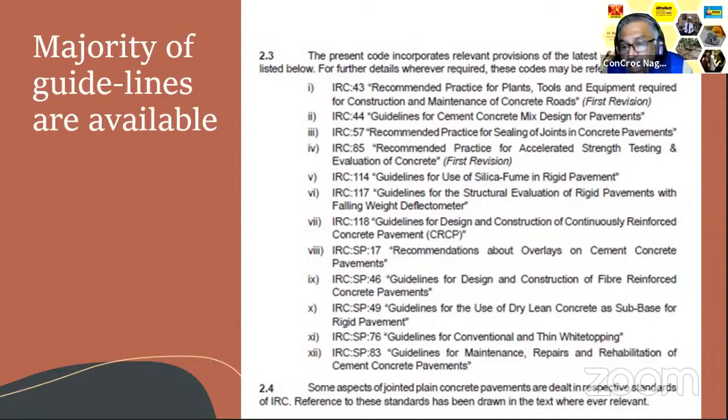And even in highway segments, state highways, or district major roads, making regular soil-based or macadam-based sub-base is very expensive, and water is scarce. Because of this, use of dry lean concrete and stabilization of soil has come in, so you will need to know all these things too.

In conventional design, when you design a building, you always design from the topmost floor to the bottommost floor. However, the construction starts from the foundation to the topmost floor.

Similarly, even in the basic construction of a concrete road or any pavement, whether bitumen or concrete, the levels for the road start from the top of the drain, because water drained off from the surface of the road should get into the storm water drain.

Otherwise it will be suicidal for the road. And believe it or not, unfortunately, ignorantly, or by oversight, most of our municipal corporation roads continuously suffer because of that. The top of the drain, which is normally constructed a few months after the road is made, assuming the road will increase its depth when relaying of bitumen happens, is kept above the surface of the road. Now where does the water go?

Number one, very important, is shoulders. Especially in case of concrete road, it's very vital, because concrete is a very rigid material. At the end of the edge of the concrete pavement, you have a sharp edge. Suppose your shoulder is not strong enough, due to rain the shoulder gets worn out. A vehicle, especially a two-wheeler, going to the edge of the road has got all possibility to skid off, roll down, or topple. So anything can happen.

So what is a shoulder? It serves as a lateral support. This is the fundamental objective. The shoulders on either side of the road, whether bitumen or cement concrete, should give lateral support to the entire structure of the pavement.

It should also serve as a safety track in case of narrow roads, when a vehicle is overtaking another vehicle, or when a vehicle gives way to another vehicle, they have a tendency to slip off from the main pavement way and come into the shoulder. Please note, if the shoulder is not strong enough, gradually the shoulder will wear away and the edge of the pavement gets exposed. So this is very, very important.

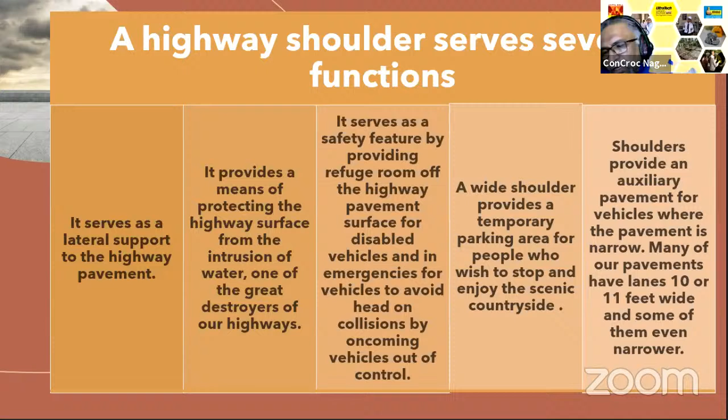And this portion of the pavement is very vital. How strong, how durable, how weatherproof you have done it. So they have to integrate themselves.

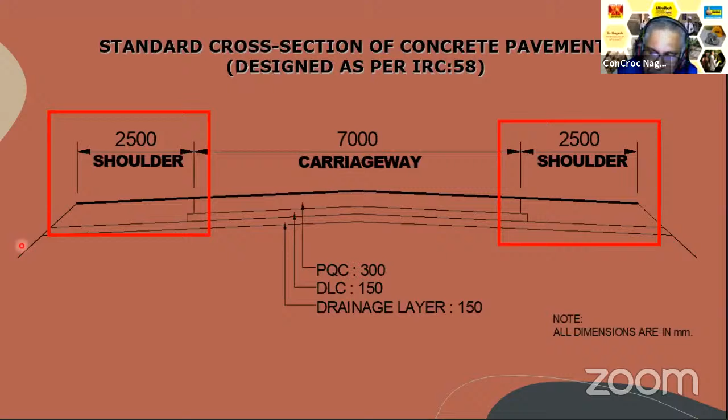Normally, this is how it is. A 7,000 mm or 7-meter carriageway is expected to have a 2.5-meter shoulder on either side, but for various practical reasons, you cannot.

And the first one is, you can see here, sorry, I have multiple pointing devices. So you can see here, this portion is where the shoulder begins.

So this shoulder would have a geotextile to prevent erosion. This shoulder is tied up with the construction of the PQC, and there will be a drainage layer to ensure that the shoulders never become soft and fail. So that is how it is.

In most urban centers and highways passing through important curves, and even in curves of some hilly areas, we use curbstones. Curbstones of various shapes are used to protect the edge of the pavement. Beyond the curbstone comes the soil or the secondary shoulder. So that is how we manage.

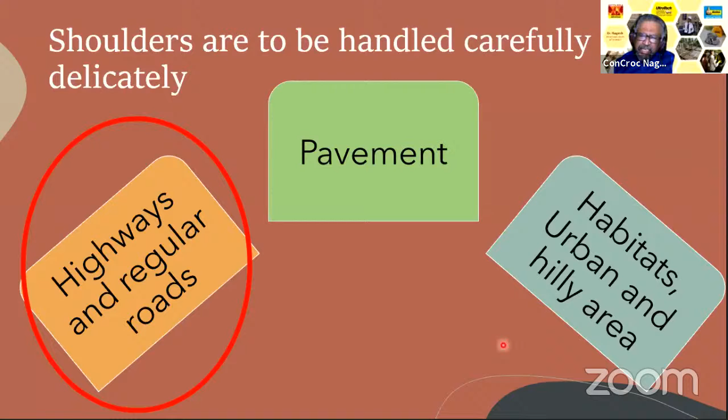So how do we do it? The other condition is habitats, urban and hilly areas. These are the two conditions that we have to look out for.

In many cases in modern day, I have seen the PQC is laid like this, it tapers down, and soil is filled here. They call this shoulder.

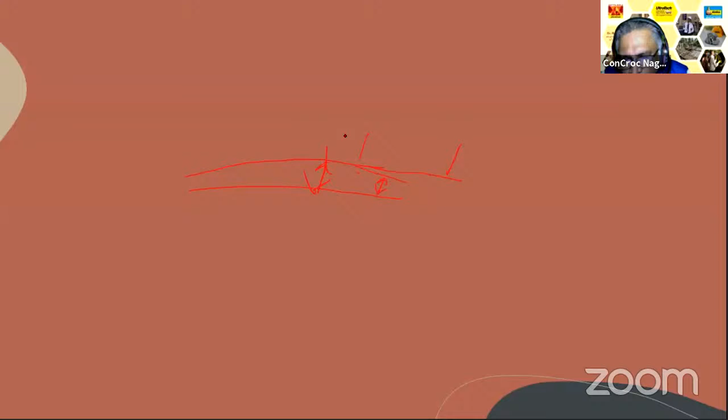Now what happens? This is a tapering thickness, T is reducing here, because of which the load coming here is W, and the load coming here is also W. Now stress is increased, and it fails here. What we actually require is something which supports here. This is a tricky thing to achieve outside in these areas.

When the carriageway is straight, the shoulders can be of equal width on both sides. But when there is a curve in the road or carriageway, the inner lane shoulder should be wider than the outer lane. Why? Most vehicles have a tendency to come to the inside when they are taking a curve.

You can see many of our friends riding in the city. When they are taking a right turn, they have a tendency to come to the left lane of the other perpendicular road, and when you are traveling towards the same junction, you will suddenly find a vehicle coming on your lane. So the inner lane should be slightly wider than the outer one.

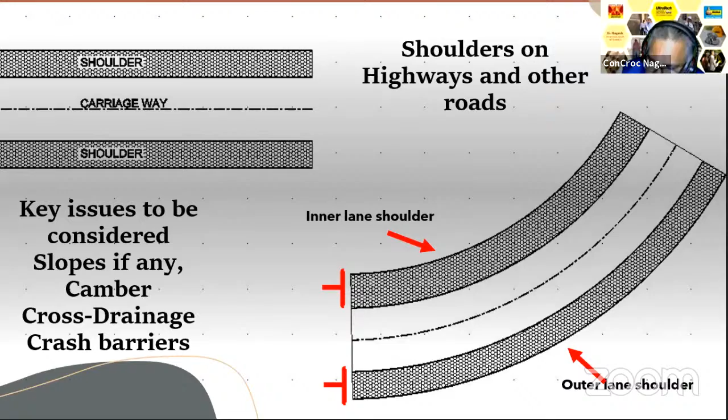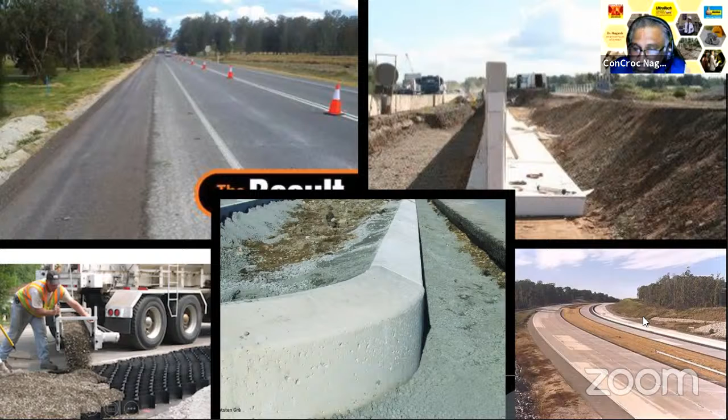Let me quickly cover what you have to look out for. Number one, very important in urban centers, are bus stops where you have to allow the bus to go inside and pick up people. That is how we make an arrangement of the shoulder - we extend the shoulder till the edge of the bus shelter.

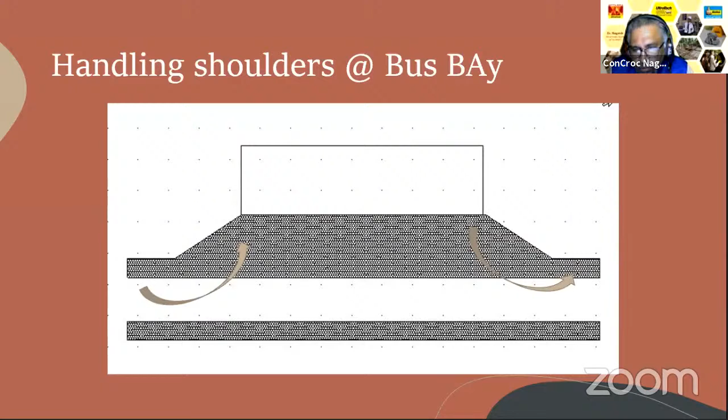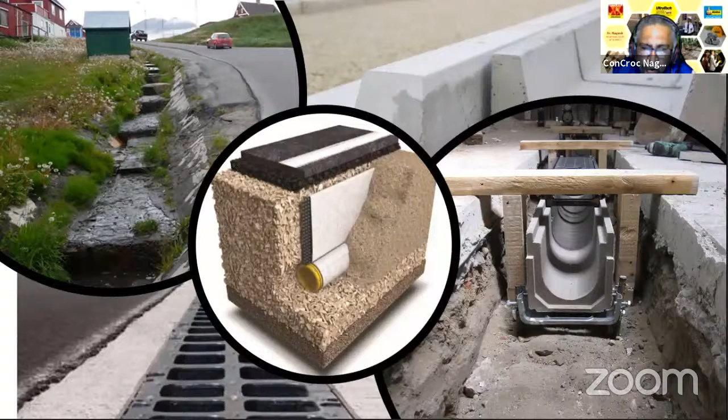Then comes handling of drains and service ducts. There are many types of drains. Number one, along the road, you have to have drainage. This is typically a crude way of doing it, a Malnad-style approach, where stones are available, the slope is available, and pitching is already done. You have pitching here, soil and a little pitching there, and the natural water flow is maintained. Water that falls in goes here, and this is not a rigid pavement.

I told you these are typically the same details for both, but I've taken an example where you can see how it is done. In case of very flat roads, or where a road is cut into a hill, on one side you'll have water directed towards the hill, and the other side towards the slope of the hill. Now, if you direct water towards the hill, you create instability.

So you have to have a drainage layer like this, with a geofabric to ensure things are kept in place, and a perforated pipe which takes the water away longitudinally. Occasionally, through a cross duct, the water is taken to the sloping side. These are precast drains being used. This is an urban road - what you see at the bottom is an urban road where top gratings are used. This is typically how a cross drain looks.

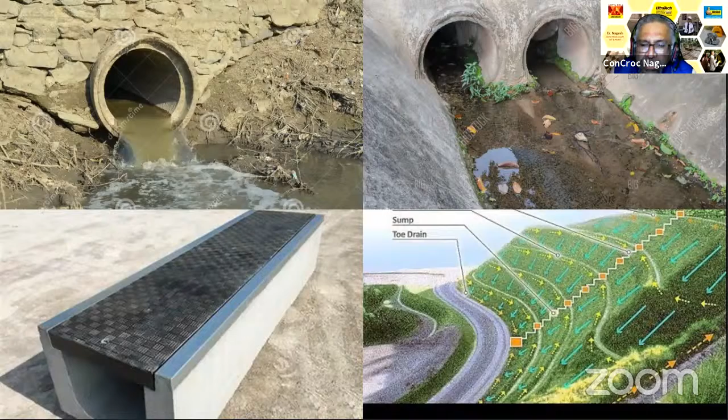These are very vital in all types of roads everywhere, including inside the city. This is another way where typical textured, architecturally beautiful slabs are made.

But when it is very highly slopy, or a malnad or mountainous area, things become difficult. Because this is not very affordable, we have frequent landslides in Indian roads because of this. Probably in similar conditions in the Alps in Europe, there aren't as many landslides, but there might be an avalanche instead.

What you have to do is have a step by step cross drain. When water comes down, you build a drain here, which also acts as stability of the slope. Then step by step there would be a sump tank or drainage point which takes the water down to the valley. The end would be a toe drain along the slope of the road, so that at a particular point it crosses the road and goes into the slope, and then into the valley.

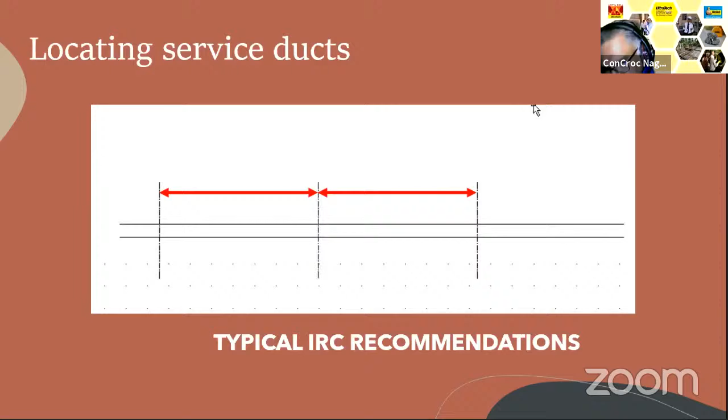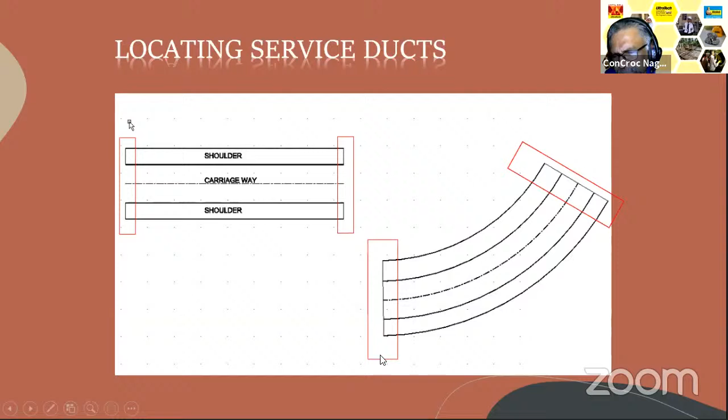So every 200 meters you need a cross duct, and the location of these ducts is again critical. Many of us forget this. In a straight stretch, 200 meters is okay, but when the road curves, even if it is shorter, you would have to have a cross duct at the beginning of the curve and the end of the curve.

Along the bus bay, you cannot have the cross duct in the bus bay itself, so you will have to have the duct just after or just before it. In case of cross junctions, it is always dangerous to have cross ducts in the junction, so it will be slightly behind, as shown in the dotted line there.

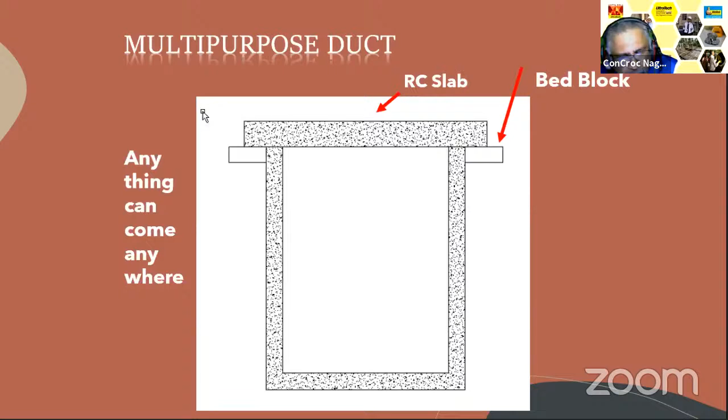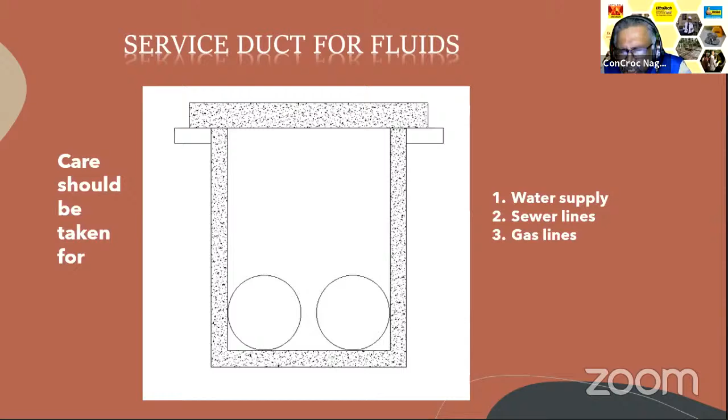Typically the other service ducts are like this. Number one, it is a multi-purpose duct. Here I can take water, sewer, cables, electric cables, or anything can come from anywhere. So we will have multiples of this. For water, we will have a duct inside which we place pipes for sewer, water supply and gas, as an isolated thing, and another one to run cables, with insulation between charged and uncharged cables.

Especially with the era of optical fibers, you have to be careful. These things are nowadays available. There are many people manufacturing precast slabs with circular holes in them. All you have to do is place them inside your drain so that the pipes and ducts don't entangle themselves, and are passed through these holes and taken up.

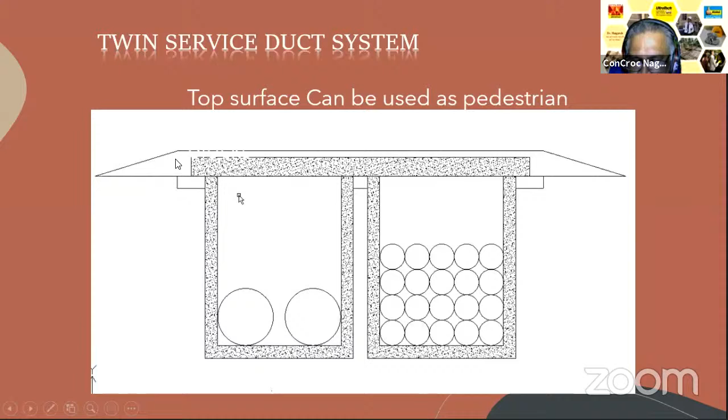So that is how it looks like. You can see on one side is where the fluids go, and this is where the cables go. They are side by side. On top we have one single RCC slab going on, and this normally is used as a pedestrian crossing. Two in one - this is how it looks right there in the pedestrian crossing.

Below the pedestrian crossing, you have the service duct like this. They are all short panels kept one side by side. So if something goes wrong and has to be serviced, they just remove these plates, go inside, change or repair the cable or pipeline, and close it back. No digging of soil, no breakage of services, nothing.

When you are using shoulders, please, especially in case of paver blocks, unfortunately many contractors and engineers of the old school of thought are not very much aware of how paver blocks behave. Old school of thought - people who are senior to me, or not exposed to these new advances in technology - they blindly use this. They think that assembling all these things like a jigsaw puzzle gives us the pavement.

The durability and strength of interlocking paver blocks lies in the lateral constraint. You should have periodic lateral constraint, either in the form of RCC plates or stone plates coming at regular intervals, thereby isolating these blocks into small panels of known dimension, since this varies with the size and shape of the paver blocks and the substrata.

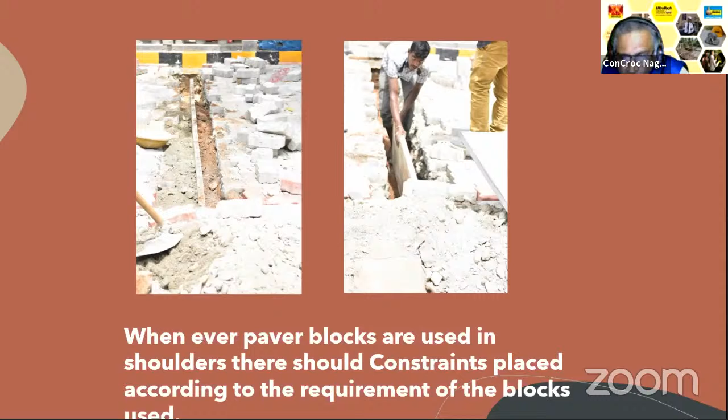Unfortunately, the department had specified that spacers be provided, but the contractor had forgotten, and the supervising engineer had forgotten about it too, so they had to redo the whole thing. This is how it looks like, and this is how we had to do it.

When it comes to machinery and plants, please note IRC 43 2015 governs almost everything that I am going to talk about now - not only the plant, but the way they have to be used, and why they are used. Everything is available there. I will show you only some of the critical parts of it.

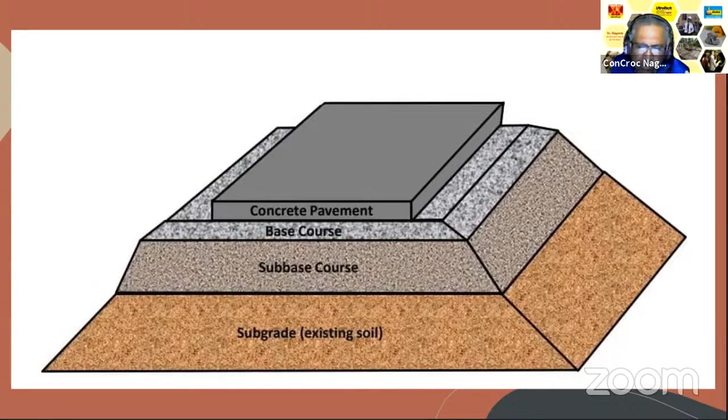Number one, earth moving and sub-base construction. This is a typical thing we've all learned. Nowadays, instead of just allowing the subgrade as it is, they try to stabilize the soil also, thereby getting a better, stronger foundation. There will be a subbase course which is granular, and then a base course. Normally in case of PQC it will be a DLC, and then the concrete pavement. In case of concrete pavement where permeability has to be controlled, there will be a plastic layer in between.

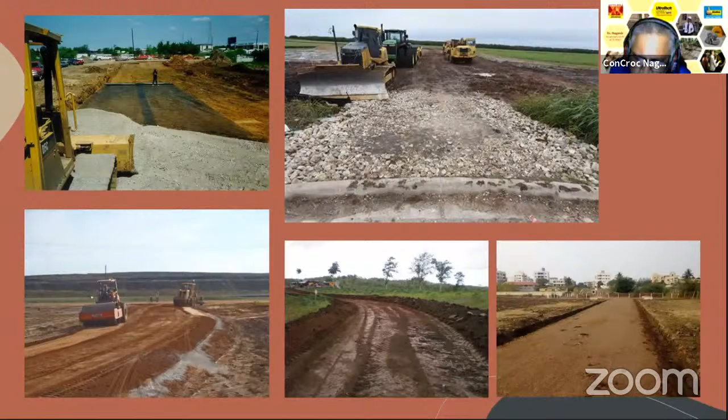This is how the construction of the sub-base goes on, and this is very tricky in case of black cotton soil. We need to have a very perfect drainage layer. Please note, whenever there is black cotton soil, when providing a GSB, the lesser the fine aggregate, the better the performance, because you get drainage of water from the surface, and you must ensure that the drained water gets out. If you close off all the sides and let the drainage layer sit there, the drainage layer itself becomes poison for the road.

We roll and finish just before. This is a small layout that adopted concrete roads. That is how things went on. Typically this is a hilly area highway, and this is another option, doing urban shoulders.

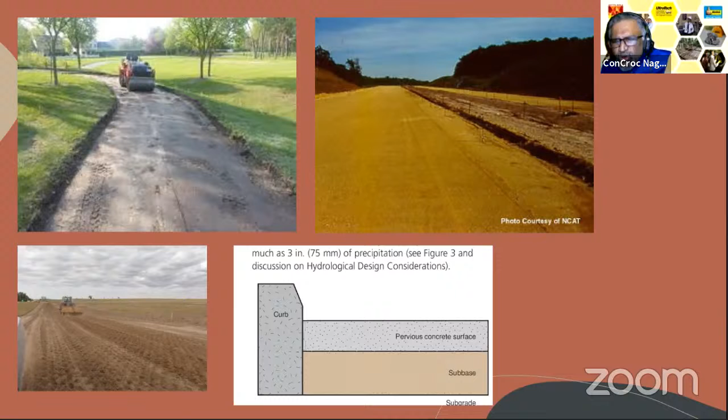They use what is called pervious concrete, where the concrete does not have fine aggregate, allowing water to pass through. Please remember, you cannot blindly replace an ordinary shoulder with pervious concrete. Pervious concrete is a system, not just a material. Once there is pervious concrete, you should allow the water to go down, and the water that goes in should be given a direction to flow, and there should be storage, and it has to go further.

And when it comes to batching plants, this is very critical. Please note, the site mixing drum mixer will not make PQC. Ordinary drum mixers are not capable of making PQC. Any concrete above M25 needs a weigh batching mixer.

If you are still adopting drum mixers, there are ways around it - you can contact me a little later and I will talk to you about how to manage these things. But you should have a weigh batching system, and only then can you get economical concrete. So number one, what are the things you have to have? You have got the code of practice for tools and plants.

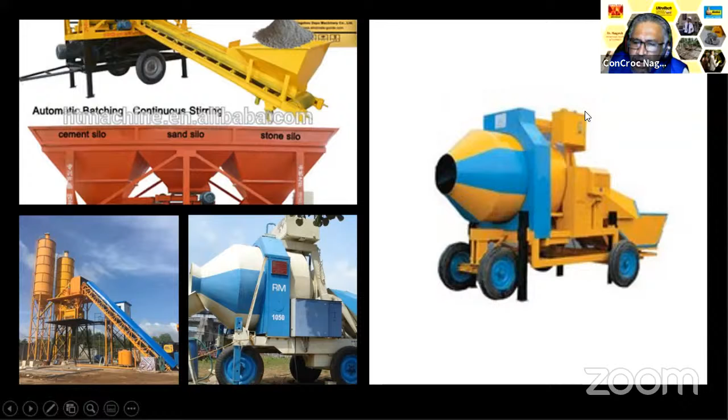Most of them are equipped with a weigh batching system. What you see on the right hand side is another weigh batching plant. This one can be semi-manual - people load aggregates into this bucket here, which gets dumped into the drum, and the drum drops the concrete here.

And these are mini batching plants which are mobile - they themselves load it, they themselves transport it. As the transportation is going on, the concrete is mixed, the water tank is there, everything is weigh batched. Some of the advanced versions of these machines also have a provision for dispensing admixtures.

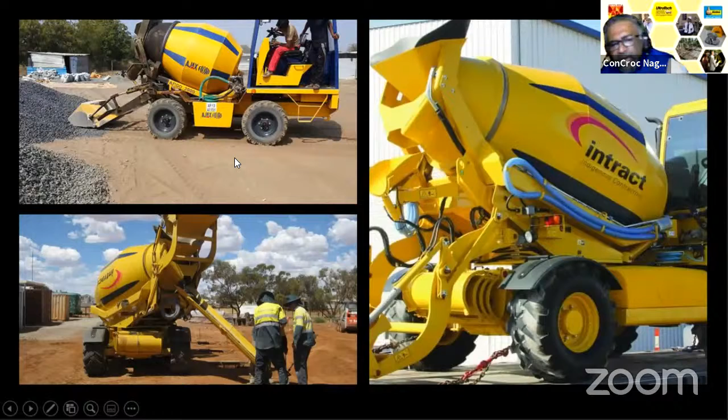In India, right now, as far as my knowledge goes, this is a very popular brand, Ajax. They have several models, including admixture dispensing possibilities. In fact, in many cases I am using this, and even in rural roads I am recommending people to hire this rather than spend too much on cement for manual mixing correction.

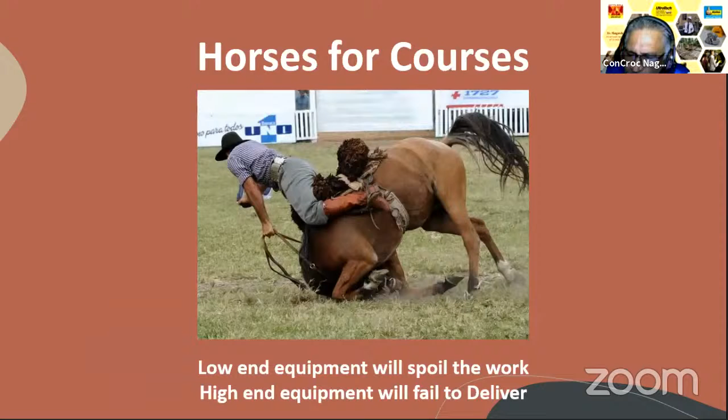So then comes the paver. A paver is like the old English proverb, horses for courses - for what you are riding the horse, you have to know, otherwise the horse is likely to tumble. So the pavers have to be selected, number one, based on the size of the work.

I cannot recommend a very high-end paver because every Tom, Dick, and Harry cannot own these pavers. So somebody owning it will allow it on rent. When I have a very small project, I do not have any financial option to go and get the best of machines, so I will have to compromise. But if the same project is very vital, I will have to go and get it, and make the corresponding financial implication available for my tender.

Then, where is the work located? Is the work on narrow roads? Then there's no point in getting a large paver. And if the importance of the work matters, then I have to look at what kind of paver I can use, or a combination of pavers. And then there's the intensity of traffic on the road - higher load means higher grade pavers, all these things will be there.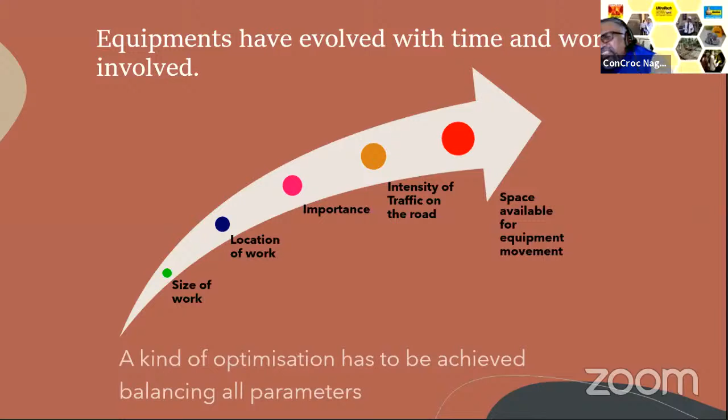Very important, in many cases the space available for the pavers to move governs which paver will come in. I have faced this situation where suddenly the road width became very small because of a small temple or a big banyan tree coming in between. So I had to stop paving at a particular point, rotate the paver by 90 degrees, take it to the other side of the temple or tree, and start paving once again. The balance patchwork in between I had to do using an alternate method.

So how did the pavers evolve? This is my personal experience also, because I have been involved in concrete roads since 2009. Not many pavers were available in India then.

This is a typical setup we used to have: two C channels holding the concrete as formwork, and a heavy I-section or channel section with a small vibrator mounted on it to induce vibration. Regular vibrators, like this one, compact the concrete, but this one was used to finish the concrete.

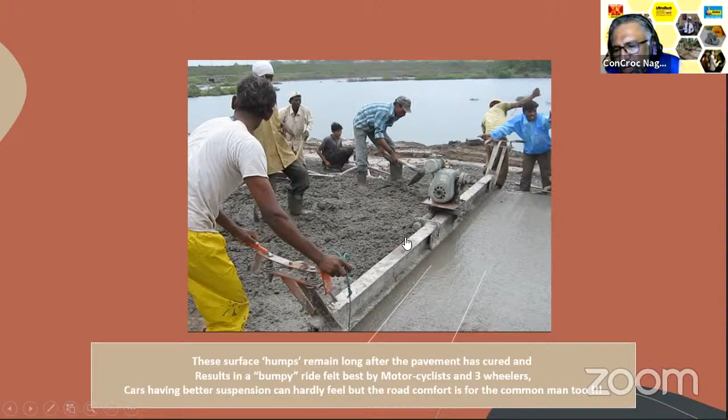We found that this setup used to create small ripples because of the single channel. You can see me working here - thanks to this field experience, since I'm not from a transportation engineering background, I learned these things on field, being a material science man. This is me working there.

One of the contractors and his fabricator came out with a novel idea. He said, sir, one channel is giving ripples, let me introduce another channel which will also give ripples - the first ripple will be neutralized by the second ripple. Indeed, it worked.

Instead of putting one heavily vibrating petrol or kerosene driven vibrator, he switched over to an electrical vibrator, which had a slightly lower vibration pitch but higher intensity. So the finishing became better and the driving became easier.

You can see that I am pulling that paver with a fractured arm. You can see here my hands are fractured. Still, I was able to pull it out. That is how it is there.

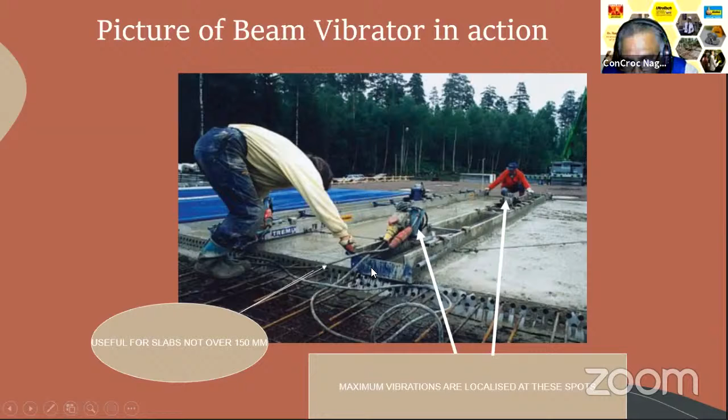This method became very popular in case of rigid pavements. Most of the concrete roads in Mangalore city - this footage is from Mangalore city - were done this way. We should be very proud that Mangalore has the highest percentage of concrete roads of any city in India, not going by length but by percentage.

When it comes to rural areas, these kinds of things may not work, and that manual pulling method is a very slow process. We wanted something that is mechanically moved - this is a truss paver.

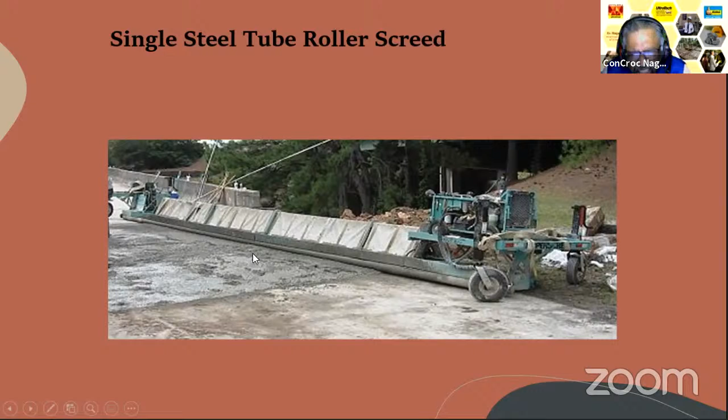There is a typical triangular lattice girder here, and below this are two or three rollers depending on the option. The engine rotates and vibrates everything, with a series of about 40 vibrators. This runs the entire machine on a set of rails, which is nothing but the formwork for the concrete road. You can see here how it works.

The driver sits here - you can see the driver, and the machine is running. This is the channel; it does a dual job of being the rail for the machine as well as holding the concrete. That is how it is done.

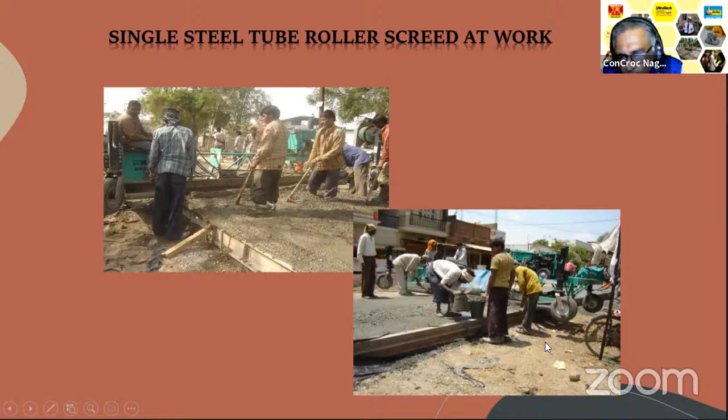Then comes more scientifically designed and better pavers - the 3-roller pavers. There are 3 rollers: one to level the concrete, two to compact and finish, and the third rotates at a slightly higher speed with a small gap, creating a vacuum that draws out surface water. This is how it looks like.

This has got an automatic microprocessor control. It can adjust the camber as per requirement, move even in curves, increase or decrease speed, dip the rod, control the vibration, and lift back the vibrator needle so that it continues working.

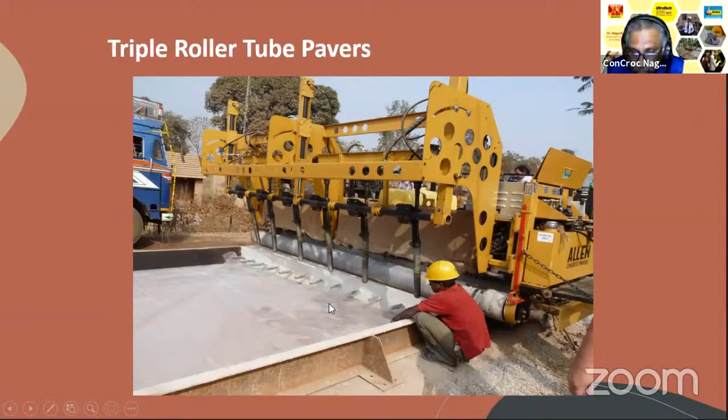Then comes the other pavers. The other kind of pavers are slip form pavers, where no formwork is required. Please note the concrete here has a 0 to 10 mm slump, and it is not carried in a transit mixer but in a tipper or dumper.

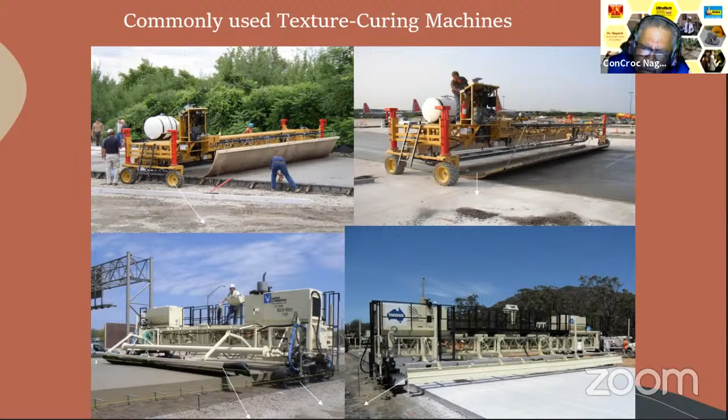The concrete is dumped at the site - I will show you those details. What you see here is a small pad; these pads rub over the surface so that the bleed water that has come out is taken away, ensuring that at any given section of the concrete, the water-cement ratio does not vary.

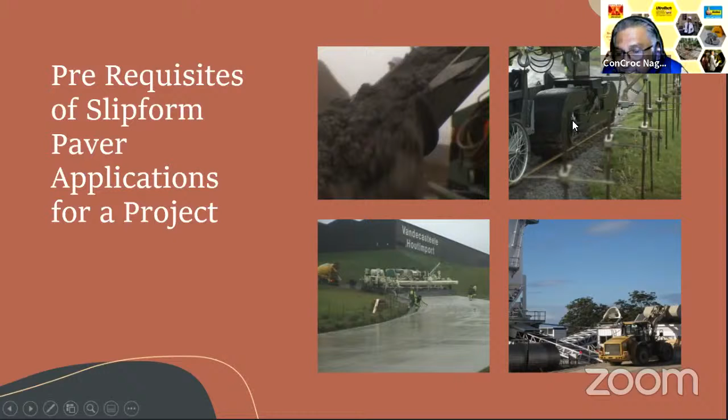A prerequisite, especially for the slip form paver, is a series of pegs like this, over which a wire runs, indicating to the paver what direction to move and how it has to move. These are different types of slip form pavers. Suppose I paved this two days ago - my paver is working.

My concrete comes on this side of the road. How do I transport concrete to here? This is an arm, the extended arm of the paver. Concrete is dumped onto this belt, a conveyor belt, that is conveyed into the paving area. Thereby, the concreting happens.

These are different types of modern day pavers, since a lot of work is going on in India today. We have a lot of things going on. These have come in recently, and many Chinese models have come very cheap. They are totally electrically driven, no diesel required, one generator is required, totally electrically driven, much smoother.

Of course, question mark on Chinese durability. I have seen many of them failing very often, but many people who bring these pavers always bring one or two motors extra, so they can replace them. Even the vibrators are driven by electrical motors.

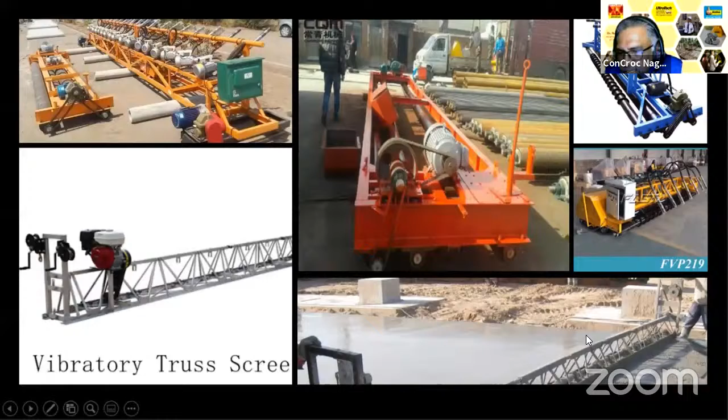To finish the concrete, you need the channels for holding the concrete. In case of a slip form paver, you don't need a former, but in case of a fixed form paver, you need a former. In fixed form pavers, the concrete slump accepted is between 40 mm and 65 mm slump; above which the paver will result in very bad output, below which also the paver will not work.

The water cement ratio for concrete in PQC is very critical and very low. So attaining strength in concrete for PQC is very easy, but attaining the right kind of workability, and maintaining that workability at the construction point, is a real challenge for a young engineer. There are a lot of innovations that can be made.

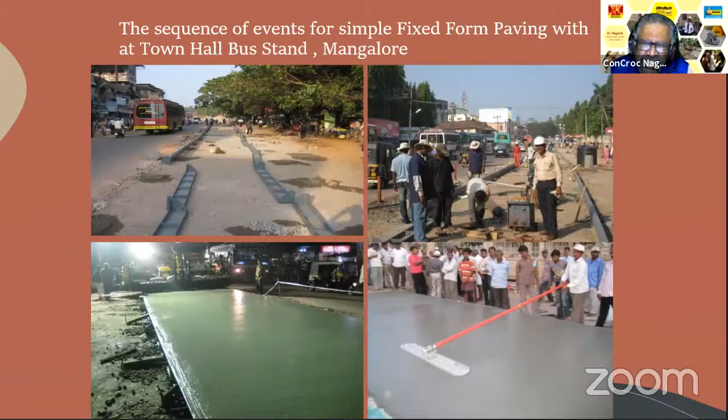So typically this is how you do the fixed form. You lay the form work and then go about it. What you see here is a bull float. It is nothing but a trowel of a mason. It tries to finish the surface after the roller has gone in.

And then how do you align it? You can see here, this is a fixed form paver. We have to align it in the right way, we have to mark it. You can see here we have marked it, and then there will be a series of pegs that are driven. These pegs, with their continuity, will tell which direction the paver goes.

But you can see the small cross link here. This is the level of the top. This gives the reference for the top level of the concrete.

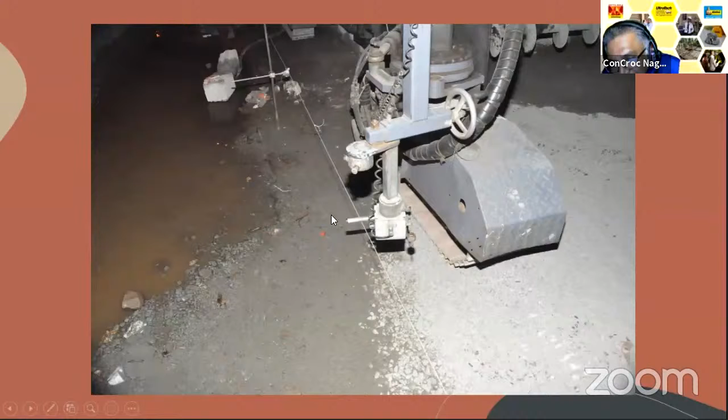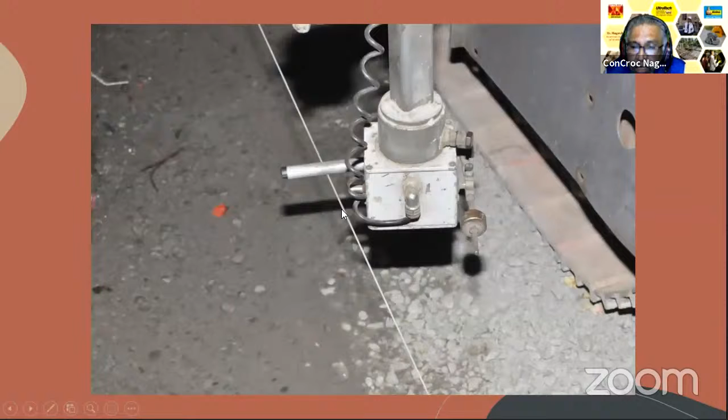These are sensors in the pavers, modern day pavers. There will be a horizontal sensor and there will be a vertical paver sensor. The horizontal sensor will always tell the paver which direction to go, and the vertical sensor like this will tell what is the top level of the concrete. Accordingly, the paver starts making its own adjustment.

At the beginning of the work, I will just tell the paver the thickness - 180 mm, 340 mm, 250 mm - and I will set the zero for the cable at that point, and the paver goes on and on.

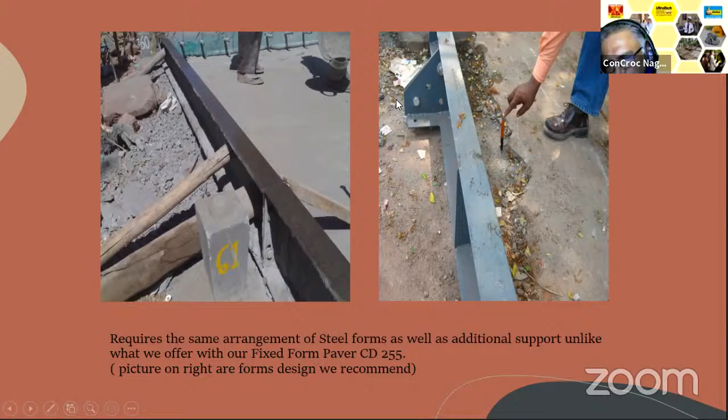You can see here how you work out small things. In earlier days, this was an infant technology adaptation in India, but even though it is more than 100 years old elsewhere, in earlier days we knew the channel has to be there, and we used all types of lousy things to support these. Later on we understood just a small bracket like this on the channel will do the job. Continuous evaluation is going on.

In all probability, this girl is also logged in today. She is a PhD scholar, her name is Dhriti. And this is Professor Swati from IIT Kharagpur. Both of them are making a study of rigid pavement in dynamic condition.

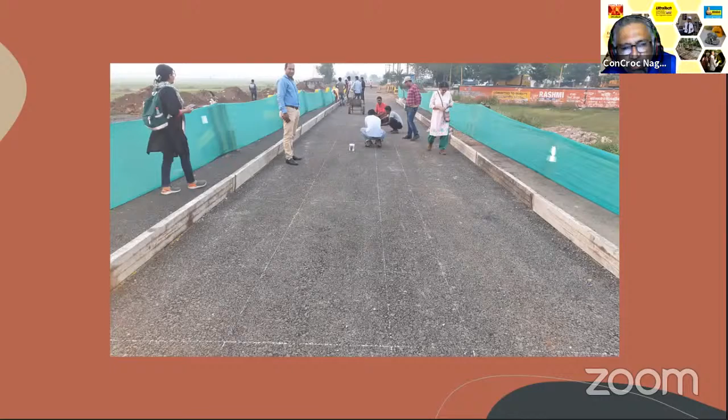As and when a vehicle moves on that pavement, what is happening inside it? Most of the Americans and European countries had this data, but in Indian conditions we did not have much of this data. So this study is being made by IIT Kharagpur, and that is how I am involved in that work at West Bengal, Kharagpur. And that is what you see here - this is how the concrete is dumped. I will tell you.

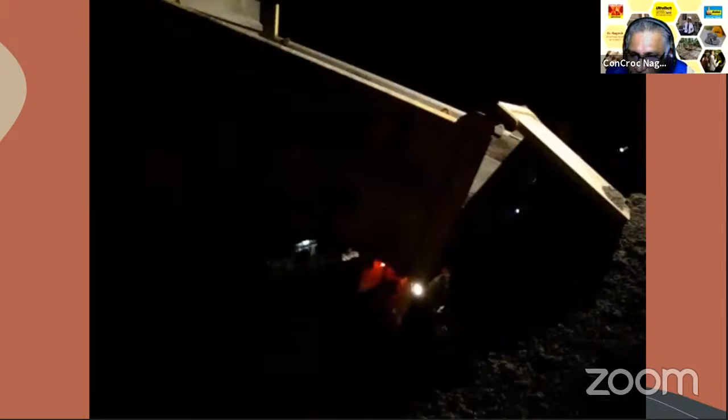I'll show you up there. This is zero slump concrete. It refuses to come out of the dumper also. In many cases, we will have to bring a JCB to move that, and this is then again leveled.

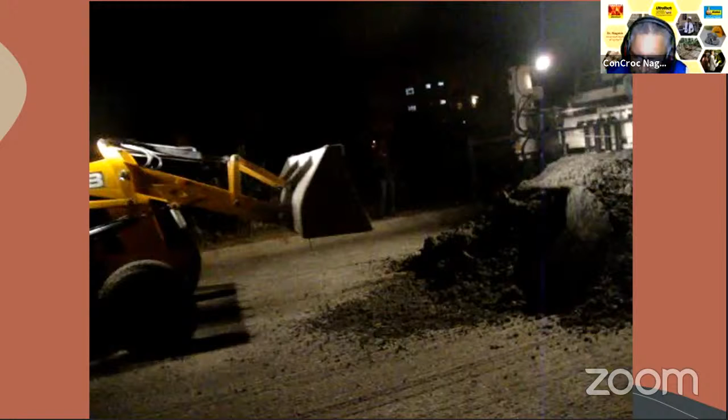It's a messy job. Most of these concrete road works happen at night because of the temperature. You need to have a JCB which will spread the concrete to a certain level. After that, you can see a series of vibrators here, and there is a leveling tool. It will feed the concrete.

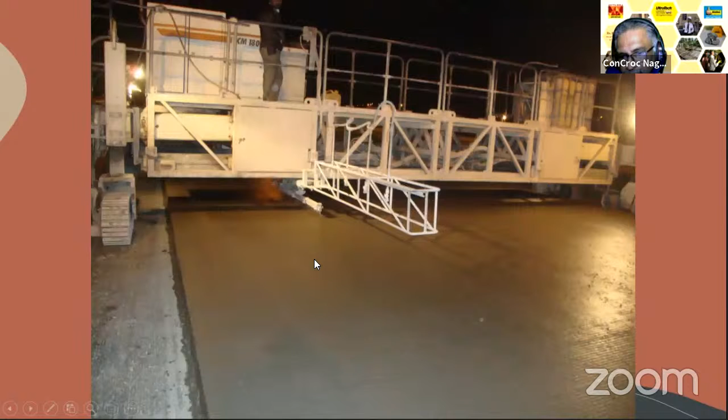All these modern day paver machines have an ancillary unit which will finish the concrete, also texture the concrete, also spray curing compound. This is texturing, this is curing compound sprayer. This is how texturing is done.

The temperature of the concrete is very vital. It should not be more than 35, 36 degrees centigrade, because you have to look out for the differential temperature. If, like this winter season, outside temperature is already 22, 23 degrees, then I have to put my concrete much nearer to it. I cannot have my concrete at 30 degrees. So 420 kgs of cement in most of the PQC. Then I will have to use ice shavings or chilled water to make my concrete.

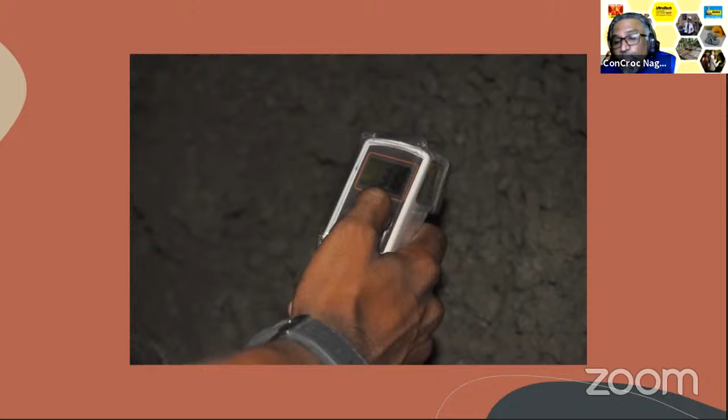That is how the finished surface looks like. What you saw there up here is a mobile concrete lab by Ultratech. We have the basic concrete testing facilities in those labs.

In the finishing work, you can see here - I showed you the bull float. This is nothing other than the mason troweling the concrete. It's a huge trowel. This is how the finishing goes on.

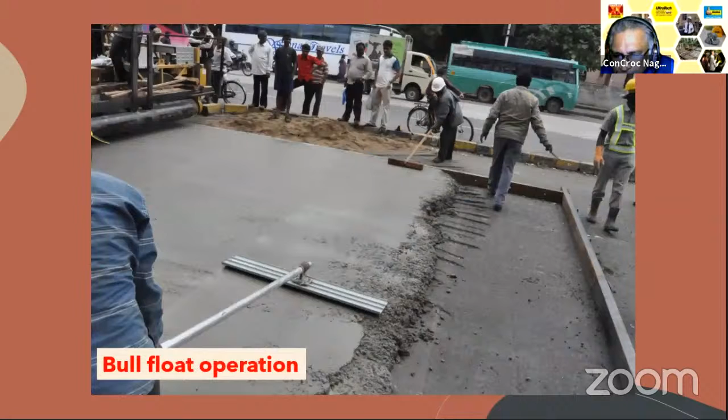In case of rural roads where this kind of equipment is not available - in regular feature I may not recommend this, but in case of very remote places where you are building rural roads, please have this one. This would ensure that the surface bleed water is taken away from the surface, thereby excess water that could dilute the strength of the surface of this concrete is taken away. So this would be an ideal thing.

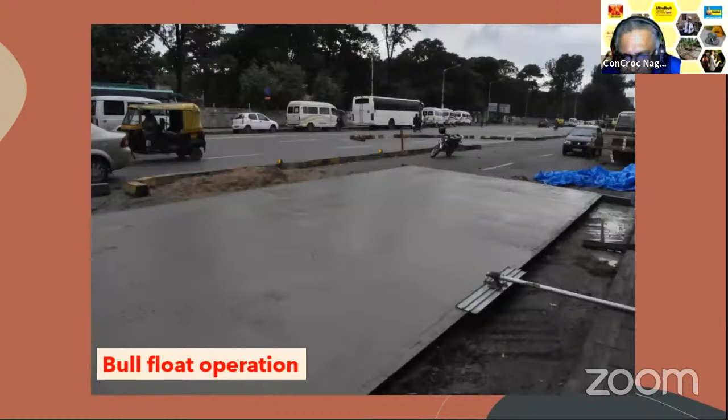After the bull float is done, this is how it looks like. Some of the pictures I have taken in the daylight so that it is easier for light and other things. This is texturing going on. These are all finishing.

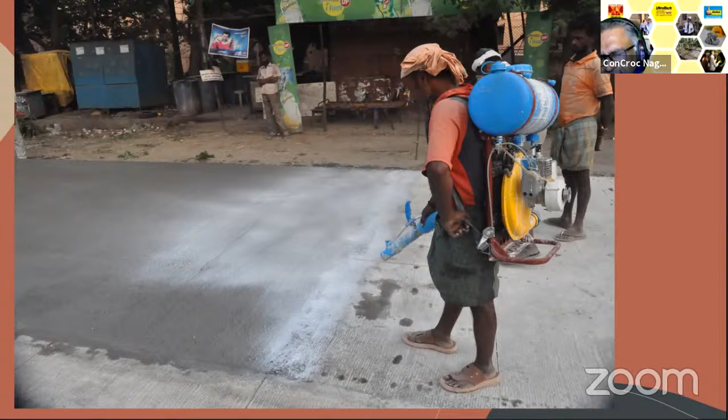Very important - after the texturing is done, just when the concrete is about to retain its shape by itself, while it's still wet, we have to spray a curing compound. It cannot wait, because one dimension is infinite - that means the surface area is infinite. The area available for evaporation of water is infinite. So you have to use curing compound.

That is how you have a lot of things, right from a small agricultural sprayer to anything like a machine. Then comes cutting at a designed panel size - you have to cut the concrete. In case of regular concrete pavements, they will be designed around 4.5 meters, where there will be a series of dowel bars. That is where you cut and allow the concrete to crack, and that will always ensure the concrete will shrink and expand, if at all, within the dowel bars provided.

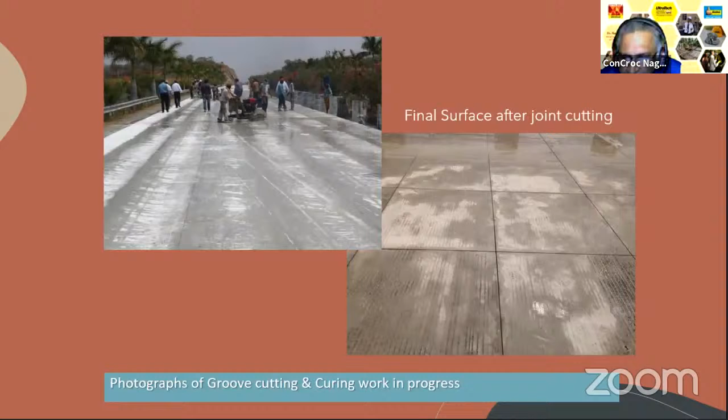Whereas in case of unreinforced continuous paving, we will have to cut it at a regular interval. In case of white topping, we will cut it at 1 meter by 1 meter. So this is how the cutting looks like - this is the cutting machine, blade, and some of these things were innovated by our own people.

This is what I saw in Bangalore, where water is very, very scarce. Instead of bringing a tractor and wasting water - because if you spray water from a tractor, maximum 10 to 15% is absorbed by the gunny bags and the concrete, the other 85 to 90% will run off into the soil. Is it worthwhile? No. This is something the contractors themselves innovated.

What they had was a temporary pipeline being laid, and at frequent intervals they brought in these water tanks. The tractors used to come and fill up this. There used to be a small portable electrical pump, which they used to keep here and pump water along a particular distance. This agricultural sprinkler worked like this, and they used to have a generator which goes up and down the site.

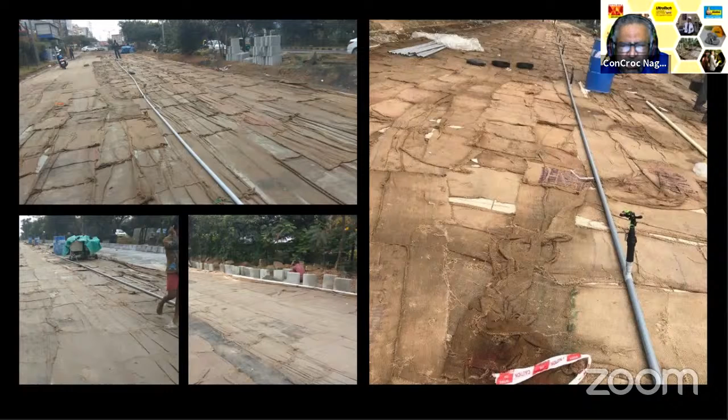They used to have the sprinkler about 40 to 50 feet, that is about 10 to 15 meters, sometimes even 40 meters, depending upon the strength of that pump. The water was very optimally used. That means almost 90% of the water was used to wet this, and the wetting was more efficient. That is how it is.

Handling of associated works, you have to look out for the direction in which the dowel bars are to be placed, and the general depth at which the dowel bars are to be placed. This is practically impossible to manually place it.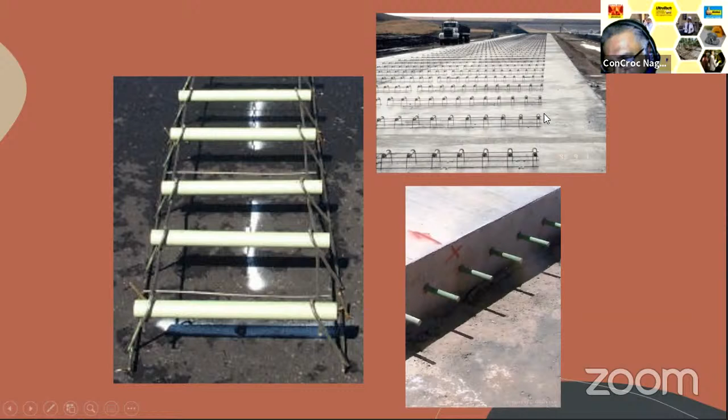So what we normally do is, using reinforcement steel, we make a chair like this. We place the sleeves of the dowel bars at the right place, inside which one side is closed, the other side we apply lubrication, like solid grease or similar material, and we insert the dowel bars onto it. And this is how things can be done. You can see here, at the required distance, we have placed the dowel bars. That is how things can be there.

And the other thing, you will have to look out for is site testing. In case of fixed form pavers, 25 or 30 to 65 slump. In case of slip form pavers, 0 to 10 slump. And in case of pavement work, it is the flexural strength which is very important. 4.5 MPa on the 28th day, traffic is allowed on that road.

Flexural strength - so beams are to be casted along with cubes. So that is a typical lab setup.

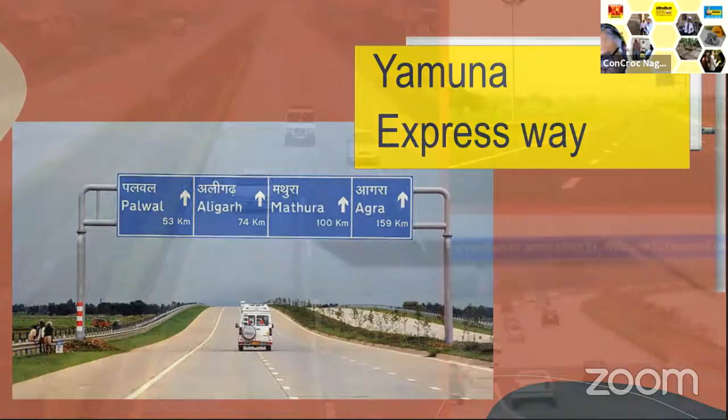When it comes to the most challenging thing that has recently happened, it is the Yamuna Expressway. I have heard many engineers who have worked on this project making presentations at various places, different people talking about it. In the early days of Yamuna Express Highway's inauguration, there used to be talk that many urban and villagers, especially the youngsters from these villages, used to go and ride on this road at a very high speed. They were demanding the cop who penalized them for high speed driving to write it on their challan what speed he was caught, and that used to be a boost for those youngsters to go back and boast about what speed he achieved on his bike or car.

But one important thing I would like all of you to observe here is the shoulder. This is a concrete pavement, but the edges are bituminous here. They have still made provision for some of the utilities, if at all they come, to be taken up. That is a very excellent design. This is how it is. You can look out for that.

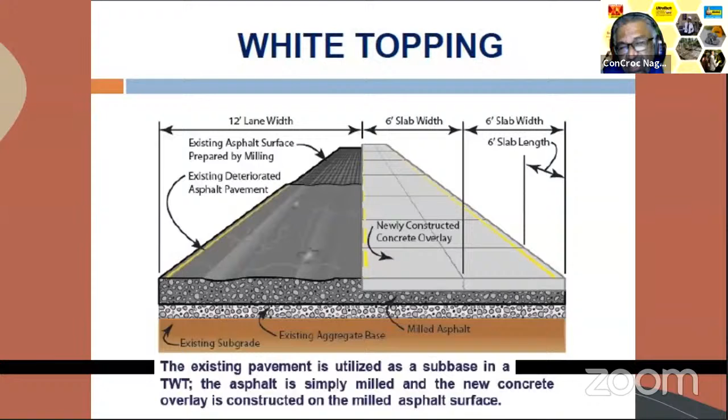When it comes to rigid pavement, I'll quickly take you through this white topping. There are some specific works that are unique for this. For people who do not know, white topping is rehabilitating a worn out bituminous surface by a layer of concrete. This layer of concrete gives more strength, but also utilizes the residual strength of the existing road, thereby making it better.

Most of these white topping works are right now happening in urban centric areas. But people from Bangalore, or people who travel to Bangalore often, I would request you to go for a drive between Mysore Road Junction to probably almost the Kanakapura Road Junction. You would drive on this white topped road.

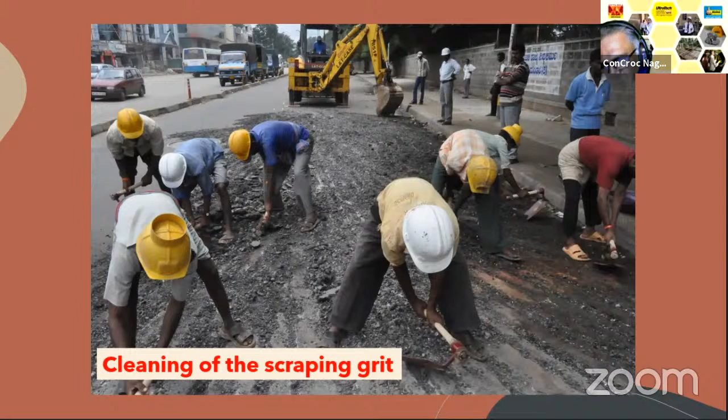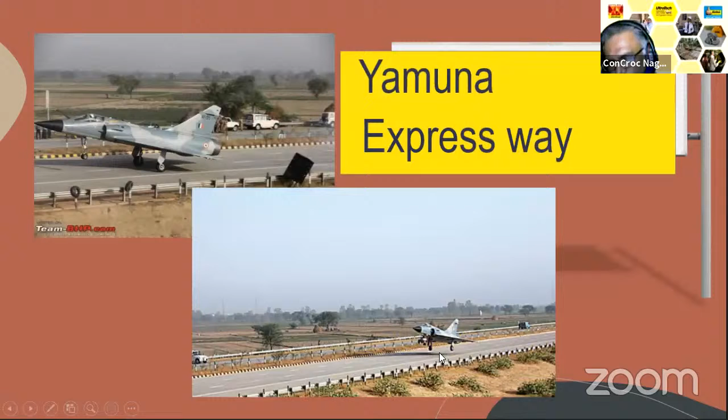A recent example, I told you, the Yamuna Express Highway - that is very, very important, and the strength of this was also checked. A Mirage was landed on Yamuna Express Highway before it was commissioned. That is the strength at which we can build concrete roads on, and that is how it was checked. You can see it is just landing and taking off.

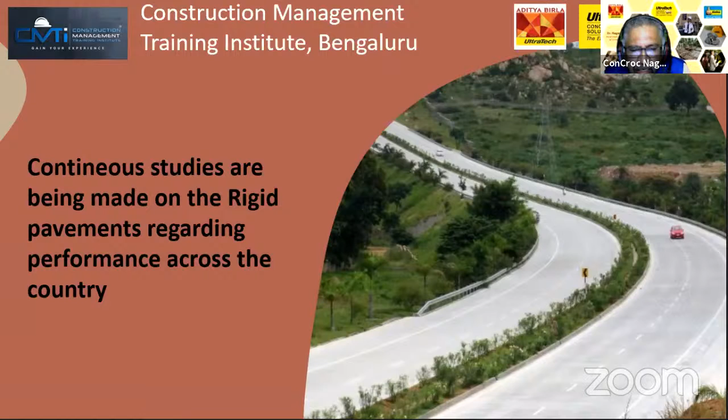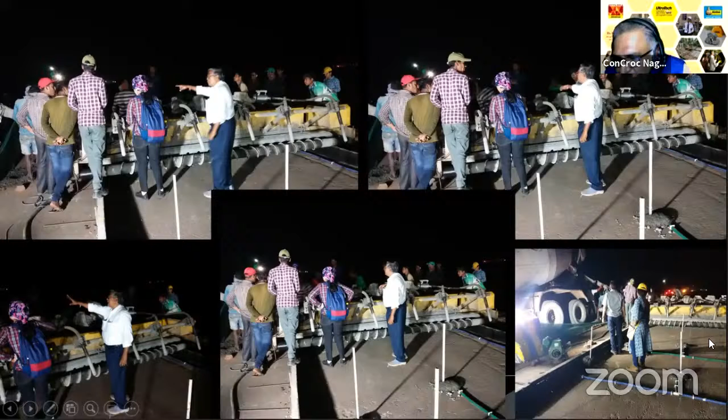These are the statistics, available on the internet or in the public domain now, and there are continuous studies being made. This is how, as I told you, Ms. Dhriti and Dr. Swati are doing this study. We have laid out several sensors - vibration, temperature, strain gauge - everything has been put here. You can see here the sensors are placed, and that is how the things are going on.

Now the results are coming in. Due to pandemic, I have not been able to go to Kharagpur. Otherwise, I would have projected some of the details on how this is performing.

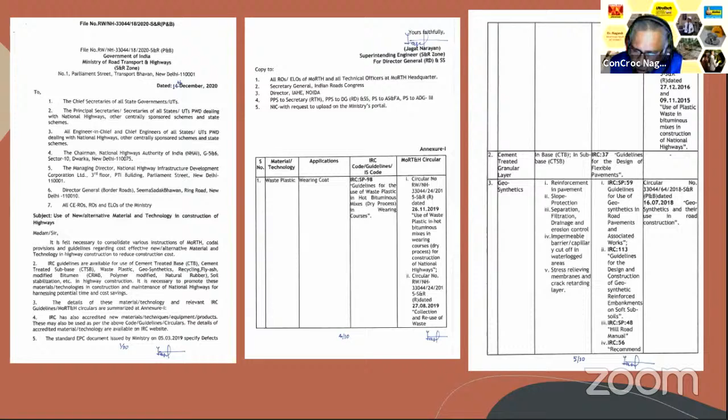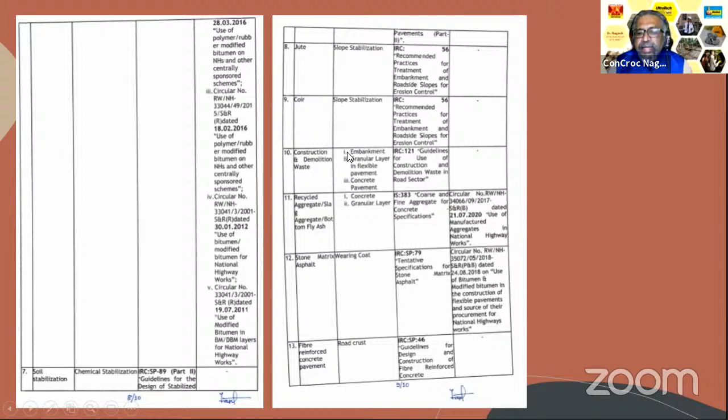As recently as 14th December, there are some amendments to IRC. Number one, waste plastic in wearing coat has been IRC approved, SP98. Second, cement treated granular layer - if you don't want very huge thickness, for WBC you can go for cement based treatment, cement stabilized, and also use fly ash and GGBS so stabilization is better with natural materials. Geosynthetics are permitted, and importantly, soil stabilization is now part of IRC. Jute and other natural fibers are also recommended based on various conditions. You can see that they are recommended - this is what you have to understand.

There would be a lot of things coming up, and I request you, don't just look at one code, especially when looking at construction code. Always read the plant and machinery code and the construction code together. But when you become a materials man, look at IRC for concrete mix design along with IS 10262, IS 383, all put together.

Please note, blended cements are permitted in IRC now, which is far better to control temperatures. Use of supplementary cementitious material is also recommended and permitted according to IRC, so thereby you can further control the temperature. You can also use materials like microsilica - not only reduce the cement content, but whatever you save by reducing cement content, you can add a little bit of microsilica and also get high early strength. You can play around with all these things.

I request my colleagues - Mr. Prabhakaran is there, he is the PQC man for L&T, he is available, and Mr. Rajendran is available. You can share your words a little bit for the audience about this particular session you attended, and share your knowledge also. Please, next 5 minutes is for you.

Request Sivaraman sir. First of all, thank you, Mr. Nagesh, for another enlightening session given to us. We thoroughly enjoyed this session. Anything and everything which has interaction with soil and foundation is tough to understand, but somehow you have made it very easy and light by means of real life photographs and actual case studies. You made it a little interesting and easy to understand.

I have done some piles with instrumented piles, I can say. Excuse me sir, Nagesh sir, can you unshare the screen so that we can see Mr. Rajendran? Yeah, I'm just trying to unshare it, so we can see the audience also. One second sir, Sivaraman sir, one second. Yeah, now you can speak.

I have done instrumented piles sometime before 10 years ago, where we fixed the load cell at the bottom of the pile cage and analyzed throughout the life of the structure. We monitor the behavior of the pile, whether it gets corroded, how it behaves under load, what happens 30 meters below, and all. Similarly, the same technology was introduced.